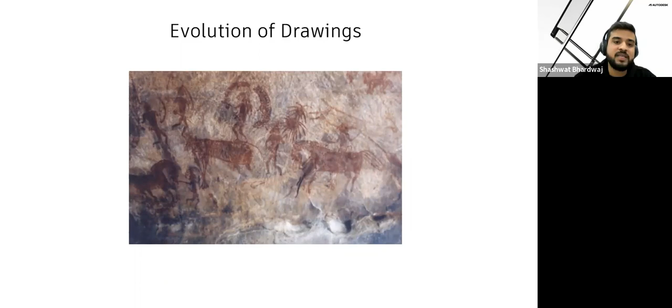To begin with, we'll start with the evolution of data in architecture, engineering, and construction industry. So the data is not new. If we talk about the Stone Age, we see that at that time also, structures and designs were being built, and information was transferred from one person to another through drawings. Drawings were also there at that time. They were handcrafted on stones, and that's how people were communicating data and insight with the help of these type of drawings, which you can see on your screen.

With time, things evolved. The paper industry came into picture. Now designers were doing and sharing the information of their designs and data using handwritten drawings. You can see an image here which was captured, I think, in the early 18th or 17th century.

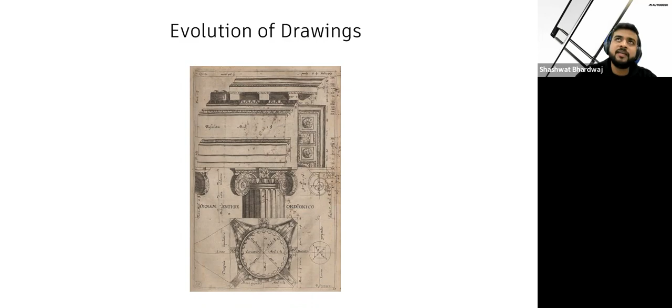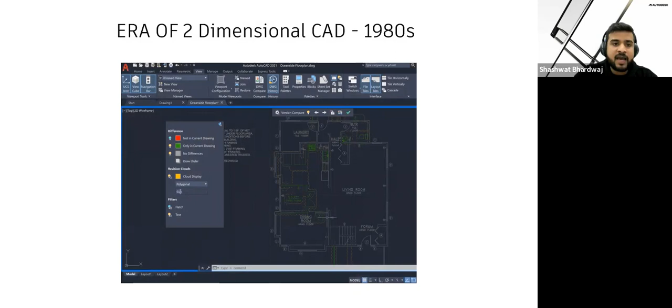Then the era came for computer-aided design. In the 1980s, 2D dimensional computer-aided design came into picture, and AutoCAD evolved. Then in the early 2000s came building information modeling. 3D modeling brought simulation analysis into the design process, demonstrating how the design will work in reality, so that it can be optimized before they build.

This is the new way humans evolve, and how information and data can be shared, so that structures or construction can happen very efficiently. It's nothing but a way of communicating information from one person to another.

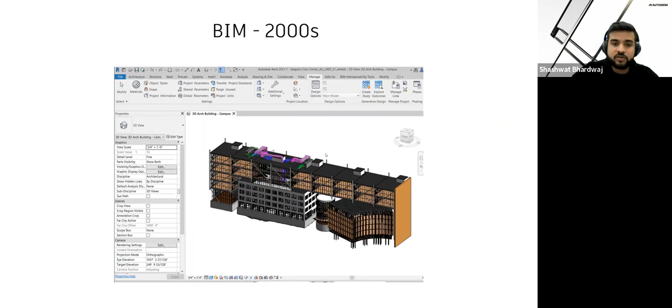Currently, building information modeling has come, so we can share the information over iPads, over 2D printed sheets, and directly to the site. But what's next? What is the one thing which was missing and is still missing right now? The design is there, the construction is there, but they are not really connected.

So the new way of evolution is cloud connected data. Data is key here, because when we are in the design phase and want to move our designs and documents to the construction phase, currently some of the workflows are not yet connected. We want to connect these workflows directly from design to construction and to the operate phase. This cloud connected data is the new future.

In today's session, we will discuss how the industry is evolving and how, using Autodesk Common Data Environment, you can achieve this. Autodesk Common Data Environment has three different categories.

If you are in a design phase and just focusing on the design side, we have a solution called Autodesk BIM Collaborate Pro, where you can do your designing. If you want to move from design phase to planning phase, we have a solution called Autodesk Takeoff, where you can capture the information you have designed and get insights from it. And if you want to move to the building project phase, we have a solution called Autodesk Build. These are the three different portfolios which Autodesk provides.

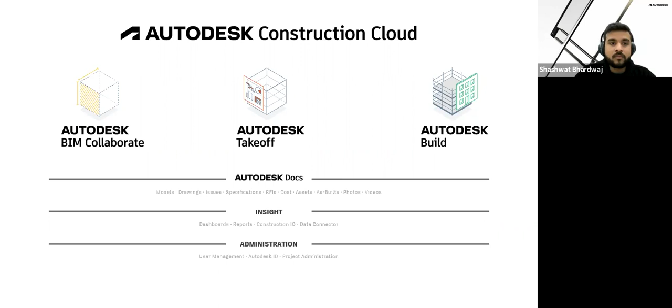If you talk about the value you can get by being in a common data environment, you will get connected teams, connected workflows, and most importantly, connected data. As the data is connected, you can leverage the information and extract insight based on your requirement, making project-based decisions much smoother. This will help you in reduction of cost, making the design and construction process fast and efficient, and you can control your project more effectively in a common data environment.

Before I move to the platform, are there any questions? Okay, I'll take it as a no.

Now let's come to the platform, which is the connected data. In the past, I will not go into the basics of what the common data environment is, what BIM 360 is, or what Autodesk Construction Cloud is. Basically, our common data environment is based on one platform, called Autodesk Forge. This is the platform where all the information is saved in one single place, and we can connect different workflows and different processes with the help of it.

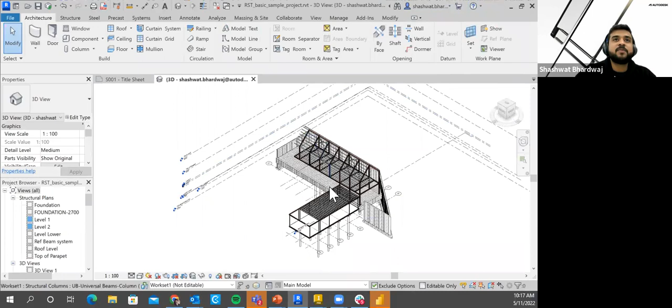Okay, so as you can see, this is my Revit model, and this is a structure model. I believe everyone has seen this model before. It's a sample model that has the information of the steel elements. You can see the columns, you can see the beams, and what we'll do is pass on this information to Autodesk Common Data Environment, which is Autodesk Construction Cloud. So this model is cloud collaborated, meaning Revit Cloud work sharing has been enabled.

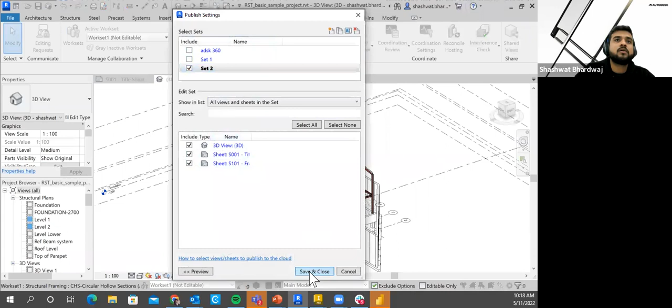You can see that in the Publish Settings, I have selected in set one the 3D view. I think I have not selected it yet, but let me quickly create a specific view, which is set two, and include a 3D view along with a couple of other pieces of information like the sheet. What I'll do is save this information to set two. Okay, save and close. I'll synchronize this model so that my latest changes are saved.

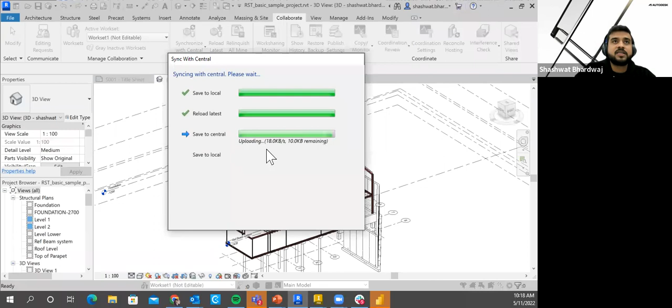Then we will publish this model to Autodesk Construction Cloud. This is saving the model to the central location, then saving it to the local host. Let me just quickly refresh this view. It's taking some time, but the information is already published. So what I'll do is open it. Okay, I think now it has come up.

So it was the structure model. Let me select and click on publish. What publish will do is take the last synchronized version of this model and publish it to BIM 360 or Autodesk Construction Cloud viewer. That viewer is basically the large model viewer. It's not a Revit model or a Revit-like view, it's a translated view, what we generally see on the cloud.

So I'll quickly open my files. Okay, so now you can see that this model is publishing. It might take some time for it to get published. What Autodesk Construction Cloud is doing is translating the data which has recently been synced in Revit, and publishing it into Autodesk Construction Cloud viewable format.

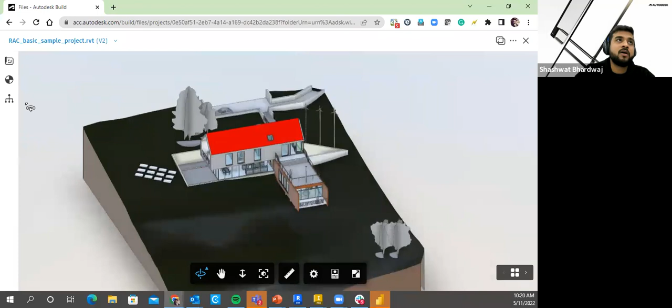Let me quickly open the other file, which is the architecture model. This is the architecture model, which was published by me earlier. You can see this is the 3D view information, which has been translated to the viewer. Now, if I want to pass on this information to Inventor, recently there has been an announcement that through data exchange, we can pass this information to any other platform. So in today's session, what we'll do is share this information to Inventor.

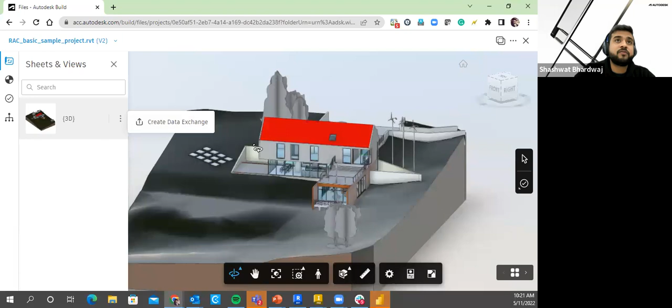How can we do that? You need to go to a specific view, select these three dots, and create a data exchange. This data exchange is built on Autodesk Forge. What this will do is create a specific file format which has all the information of this model as a data exchange. Let's say this is the roof, and it has some material property, it has some geometry property.

So what this data exchange will do is create a file format, and you can select where you want to save it. What I'll do is save this to the project file, and here you can see that a total of 629 objects will get saved. This includes geometries, properties, and 3D view. So I'll hit on create exchange.

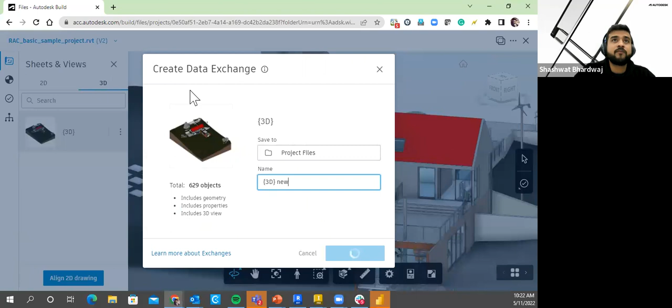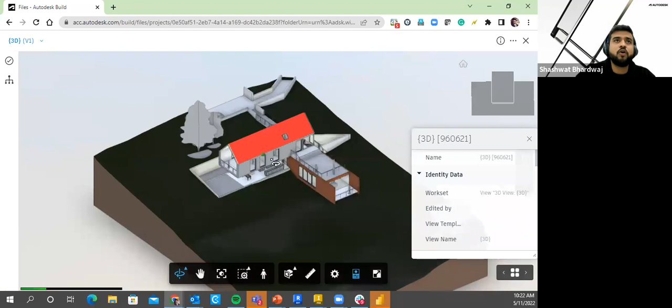And once it's done, it will create an exchange file format here. You can see that this is an exchange file format. You'll not be able to edit or copy this, but we will use it to import the data into Inventor. If you quickly want to view what's available in this 3D.v1, you can see it has information of all the geometries. Let's say if I want information of the roof, it will give you all the information, like what is the extrusion, what is the property, which phase it has been created in, what is the area, volume, etc. So this is the data exchange format that Forge has created in Autodesk Construction Cloud.

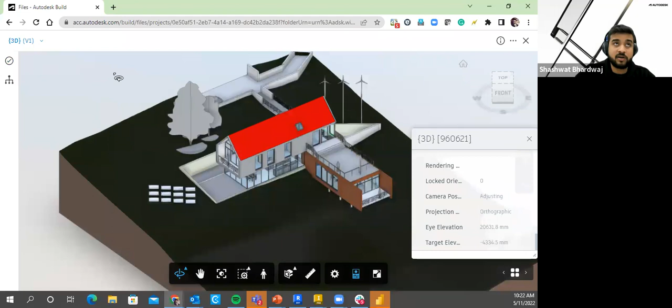Yeah, okay, maybe a question from me. So I'm very curious about this exchange format file.

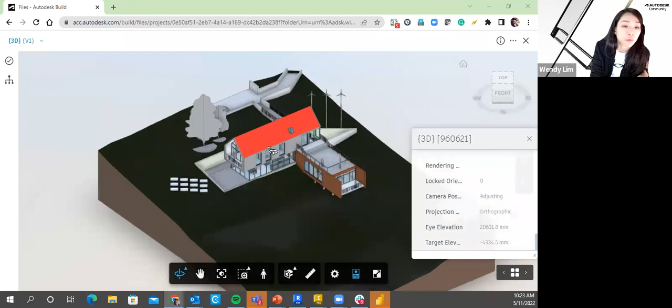Is this an IFC file, or can this file be viewed from other software that is not part of Autodesk? That's a very good question, Wendy.

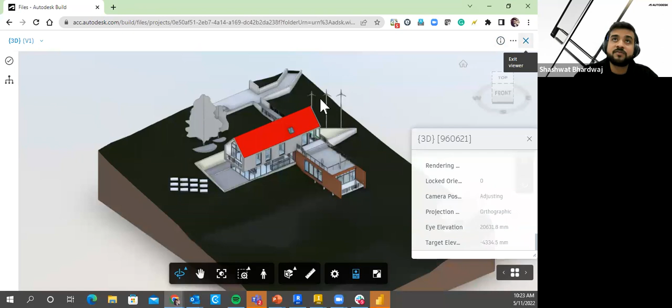So this file is not an IFC file. It's an exchange file, and it is currently only able to be opened in Autodesk software. For example, only Inventor can open this file, and we'll not be able to download this file.

So this is the file format. If you want to open this in Inventor, what you need to do is open Inventor, and as this is an exchange format, you can go to Collaborate, select the Data Exchange option, and since that file is saved in Autodesk Construction Cloud, you can access it directly from the Data Exchange option.

Okay, I think it might take some time, so let me reopen Inventor.

In the meantime, as this exchange file has all the information regarding the geometry and properties, you can also export this information as an Excel file, or create your own dashboard based on what you need. So what we'll do in today's session is only cover the Inventor part, like how you can connect the design data directly to Inventor.

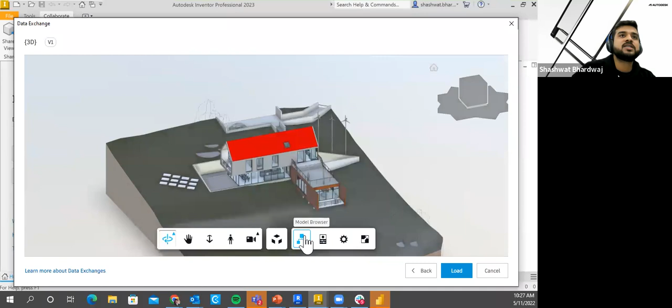You can see that this is the 3D view, and it will open the Forge viewer or the large model viewer, and you can preview all the information before loading it in Inventor. This is the architecture file which I created for the Exchange. You can preview this, view the properties, model browser, and all.

But I'm only interested in the 3D structure, so I'll click on 3D structure and hit load. This will load the model. However, loading might take some time, so in order to save time, what I've done is I've already created and loaded this in Inventor.

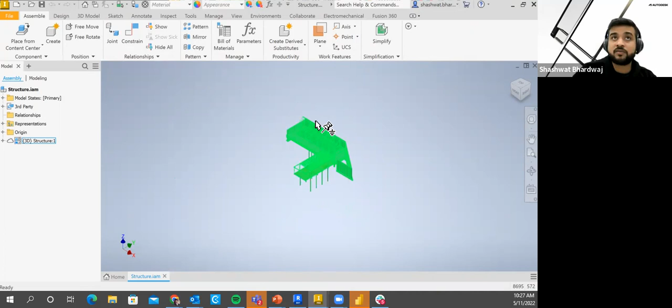Let me just move this. Okay, so you can see that this is the model which we created or modeled in Revit, and with the help of Data Exchange, which is a feature by Autodesk Forge, you can pass on this information in Inventor. If we talk about the model tree or model structure, you can see all the information is segregated into different folders, in the family tree, in the file tree.

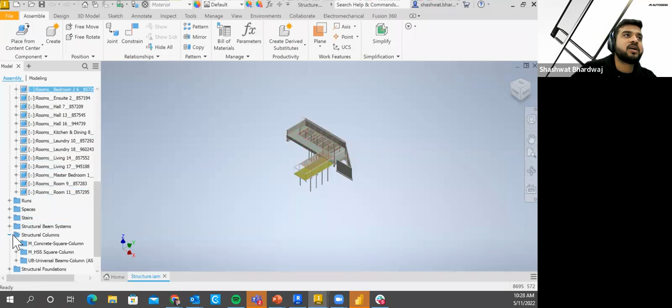If you want to select the room, or maybe select the structural column, you can select all the structural columns in one go. So basically all this information which you created in Revit, now you can view that in Inventor.

Previously, the workflow was very different. You needed to export directly from Revit to another format, and then import it. But now, as everything is happening over the cloud, you get accessibility of data in one single environment. Previously, with manual export and import, there was also a probability that the information you were consuming was not up to the latest.

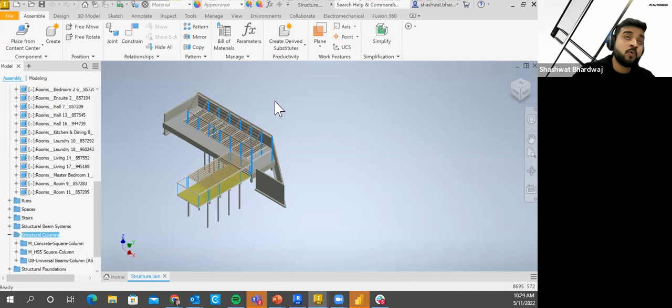But as this information is already present in the cloud, you can see which version is published, when it is published, and by whom it is published. So you will get the latest and greatest information of this model in a common data environment. This is one way you can connect your design data directly with any other software.

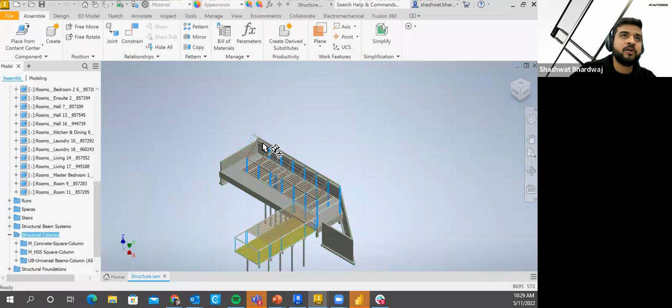In this session, we discussed how, using Revit and Inventor, you can pass the design data created in Revit directly into Inventor, and you can directly start your work in Inventor and push your design data to construction or to the manufacturing part.

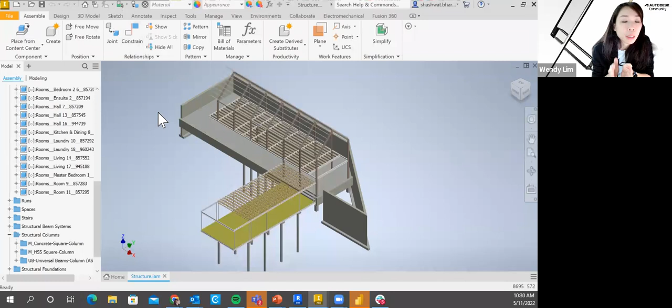And Shashwat, is this interoperability works for other software, like for example, from Revit into Civil or InfraWorks and then back into Revit, and making sure that there's always a dynamic relationship between the software?

That's a very good question, Wendy. So for now, this connection is possible only in a few software. Inventor is one. There are other third-party softwares which using this tool we can connect, and we are still building the capability of data exchange in our other products and portfolio. So moving forward, whatever information you are creating from the design software, you will pass that information to a common data environment. And from that common data environment, you will get the freedom and technology to pass that information to any other software.

So basically what we are trying to discuss here is the future of data accessibility in the Autodesk AEC industry. The future is that data will get centralized in one single place, and you can pass that information from one software to another without any hassle or problem. But to answer and summarize your question, currently this is only available in a couple of software. Inventor is one of them, and moving forward, we are looking to include this in other parts of the design industry softwares.

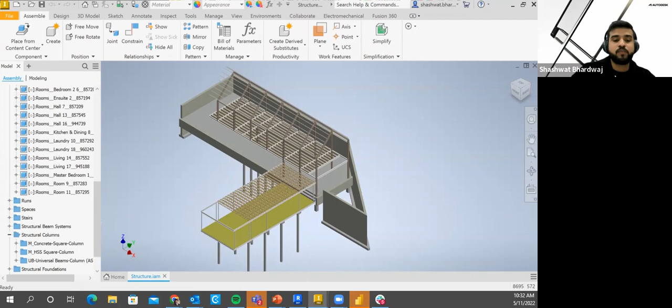So yeah, this is regarding the data exchange, how you can share your design data to manufacturing software like Inventor. Similarly, you can also exchange your information to other formats. Let's say you have a Revit model with information regarding doors, windows, etc., and you've saved that model in Autodesk Construction Cloud. You can share that information to an Excel file or to a Power BI dashboard, and you can create a dashboard with the help of data exchange.

That connector is currently available and can be done using Microsoft Power Automate. With Power Automate, you can link this data exchange to your Excel file. So as soon as the Revit model gets updated with information, your Excel file, spreadsheet, or any BI tool linked to that information will also get updated.

So this is the future of data. The data is not constrained to one software, but you can capture the insight of that software into any platform, any BI tool, any Excel tool, any kind of data extraction tool. This is currently available using Power Automate. Because we only have a couple of minutes, I won't be covering this in more detail.

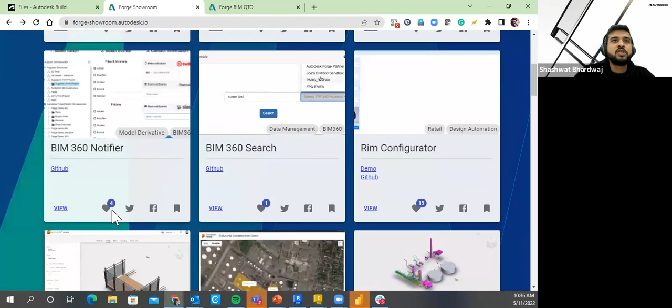So there are a couple of things. For example, if you want to create a PDF export of all the clashes which you have created in Autodesk Construction Cloud, you can capture it. If you want to create a clash issue and generate a report out of it, you can get this done using this application.

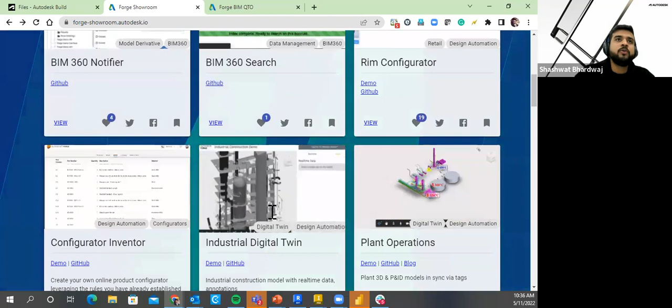Or for example, you want to create a digital twin of a particular model, and you want to connect your IoT sensors to your BIM data, which is present in Autodesk Construction Cloud. You can do so with the help of this tool.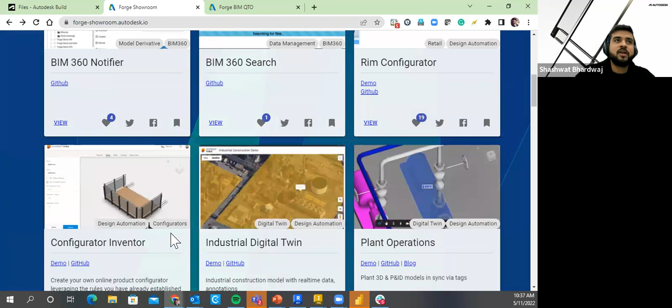So there are a couple of other tools which are very interesting. Please feel free to go to Forge Showroom and explore what all possible solutions are present.

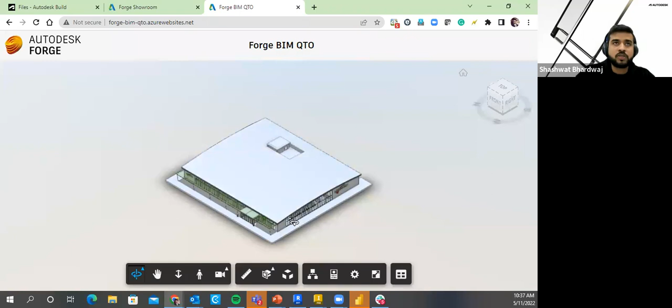So today I will discuss the building information modeling quantity takeoff application. This is a proof of concept which has been developed on Forge. This is a model which is already there in Autodesk Construction Cloud, and with the help of Forge, we have created an application. What this application does is quantity takeoff.

So if I say I want to capture all the doors which are present in this model, what I'll do is go to report, go to door, and I can see that it has highlighted the different doors and door types. Now, if I want to capture the height information also, you can see that all this information is present.

Now, why we are discussing this here is because that design data is already being pushed or published in Autodesk Construction Cloud or in the Common Data Environment. Autodesk Forge is a tool which is helping you capture that data, which is published, in one single application. So what you are seeing here is the data, and this data is now accessible.

Previously, when you were modeling, let's say in the 1980s or maybe in 2000, all this information was hidden in the software. Like in AutoCAD, since it's a 2D tool, you would not be able to capture all this information at this level.

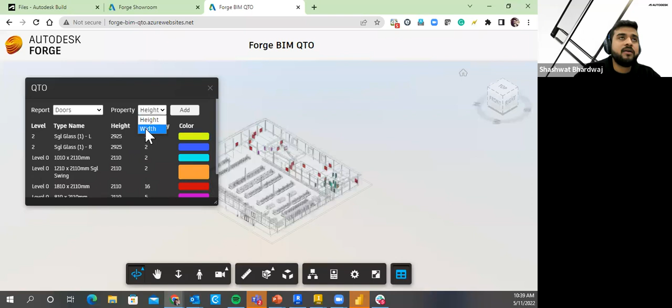But now, if you talk about building information modeling, you can feed in different type names, different heights, quantities, and all. So this is just a small sample of the information. You can capture a lot of things, and create a single model which has a lot of information.

Now with Autodesk Forge, with the Common Data Environment, you have the potential to capture all this information in one single dashboard, and you can create your own dashboard, your own applications based on your requirement. Previously this was not possible, but now, as connected data is happening, you can capture all this information through Forge. So this is one example of how you can capture it.

Are there any questions?

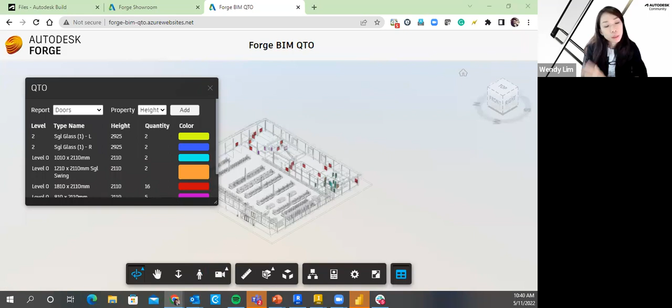Just curious though, Shashwat, how different is this quantity takeoff compared to the one within Revit, for example? So if we talk about Revit, you can also capture the quantity via schedules. All that information which is already present in Revit is the exact information you will see here. So this height, what you are seeing for this particular door with this type name, that is the same information you will see in Revit. So there is no difference. The information is exact and to the mark. I hope that answers your question.

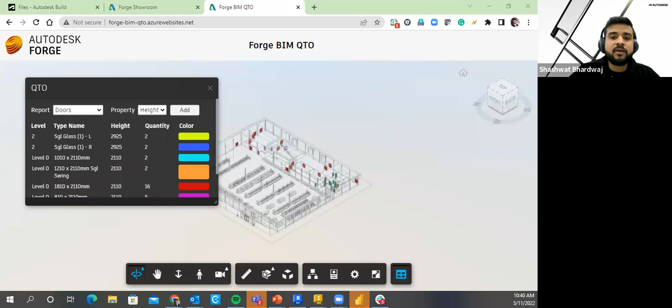And the information which you want to publish to the Common Data Environment or Autodesk Construction Cloud, how do you do that? You need to go to Revit and select which information you want to publish. So in this view, you can see that this beam is there, this column is there, this beam is there, and this has some information inside it, like the property level information.

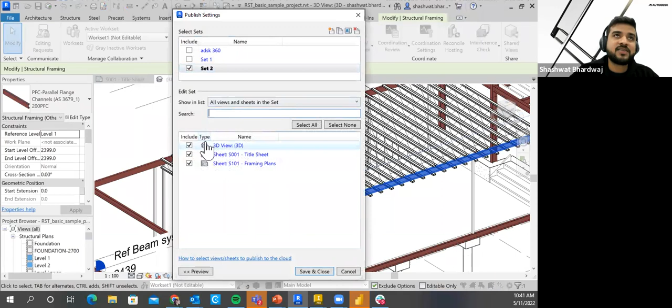But if, by any chance, you don't want this beam to be published, you can hide this beam in this particular view, and before publishing, you can deselect this view, and before publishing this to Autodesk Construction Cloud, just make sure that the information you are placing in here will get published to the cloud. So this is one way to capture and restrict the information which you don't want to publish to the cloud.

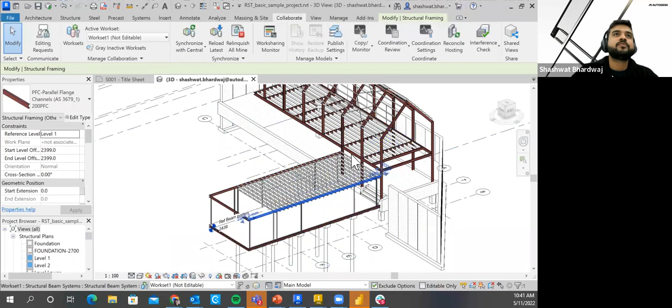Okay, so this is what we discussed regarding Forge Showroom. Now, what we discussed mainly was how you can capture the data directly from design tools, and how you can create an application and play with it using Autodesk Forge APIs.

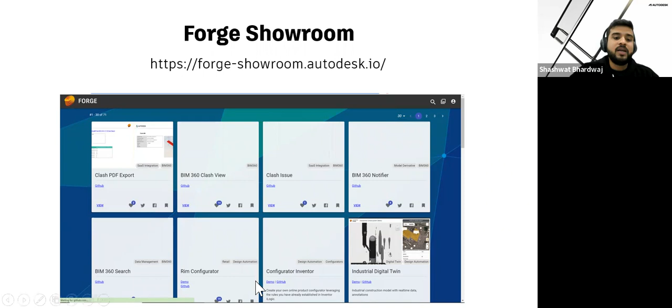Now let's discuss how the data is changing the way we are capturing insight and analytics in the AEC industry. Autodesk has a couple of solutions regarding insight and analytics. Autodesk Construction Cloud, as you know, is a unified platform.

So you can collect different sorts of data points. Data points can be in the form of models, documents, assets, cost, photos, drawings, videos, and you can collect the entire project life cycle from design to construction in one single platform.

Using that unified data, you can capture insight, harness the power of your data to make better decisions faster. You can create dashboards, you can create reports through Construction IQ and Data Connector. All this is possible.

So this is one example of how, using Autodesk Construction Cloud Insight, you get a dashboard which has all the information. You can see the project address, where you are, the current location. We call this a card.

You can create different cards. In this one, you can see that the quality card has been added, showing you what the risk is. The quality risk is governed based on the issues created in the project. So this particular dashboard's quality risk card is capturing the information of issues in this platform.

Now coming to the Data Connector. This is a tool which has been recently enhanced. It was there a few months back, but there have been a lot of enhancements done in this tool. What this tool can do is extract the information which is there in your common data environment and export it in the form of a data point.

For example, if you have design data in the form of, let's say, issues - let's say there are 100 issues created in your project - this tool will export all that information, and you can export this either in the form of an Excel file, or you can directly connect this to any of your BI tools.

So the value you get from this tool is connected data. Connected data means the data you are feeding into your common data environment will get extracted using this tool, and you can create the dashboard based on your requirement.

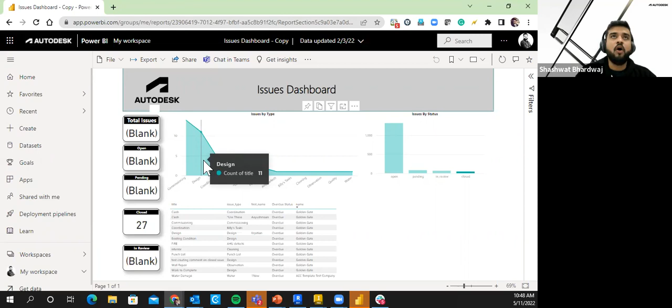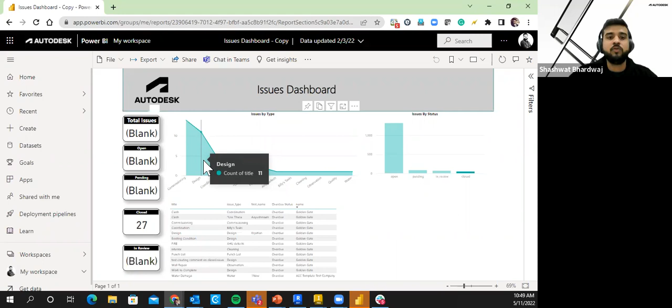The important thing to note here is previously all these insights were taking a lot of time for the construction manager and for the project engineers. It was taking a lot of toll on them. But now as this information is standardized, you can capture all this insight in one common place with the help of the data points created by you guys in the common data environment with the help of Forge using the data connector tool. Any questions?

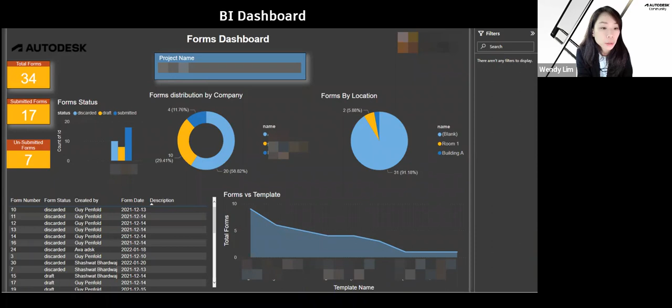Shashwat, for the Power BI, what about the licensing? For example, do I have to have a Power BI license because it's not part of Autodesk, right? Or do I just need to view it and there's no need?

That's a good question, Wendy. So if you have Autodesk Construction Cloud access, you can capture all this insight in any BI tool. If you talk about Power BI, yes, you need a license to access these services. So you need to purchase, or simply get the Power BI license, and there is a data connector application. You can capture that data from that data connector, and then you can create your dashboards as per your requirement. So the data you will get in raw form, but in Power BI you need to connect everything. You need to make relationships, and with that you can create these beautiful dashboards.

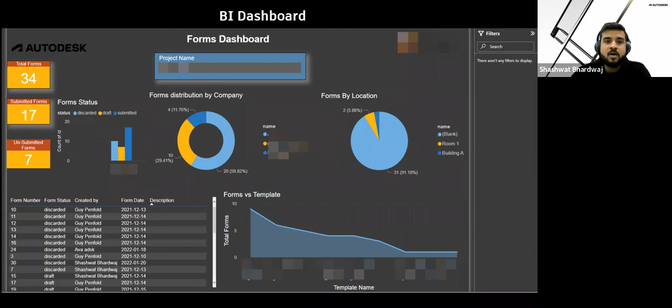Okay, so I believe this is all we had today. So what we discussed first was how the data evolved in the AEC industry from the Stone Age. We know that information was already there, but now with time it evolved, and the important thing is that we can get more insight, capture more insight in the coming time.

Then we discussed the Autodesk Common Data Environment, which is Autodesk Construction Cloud, how you can create your design in the design phase using BIM Collaborate Pro and capture the construction data using Autodesk Build, and you can connect directly your design to the construction process.

Then we discussed the platform, which is connected data. We discussed how you can connect your design data to any of the products, and today we discussed how you can connect Revit to Inventor using the data exchange workflow.

So there are a couple of other workflows, like you can also connect your Excel sheets. You can create your Power BI dashboard based on your design data from Revit.

And in the end, we discussed how the data insight and analytics can be captured from the common data environment, and how you can utilize the data which you create directly from the design phase to the construction phase, and you can create your own dashboard and capture the insight and analytics of your project. That would help you make your project more successful with less errors, less time, and it will improve your efficiency.